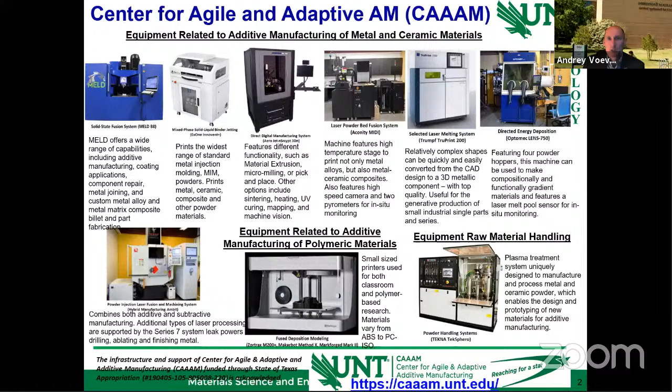This is combined with facilities we also have in coating and thin film deposition, which is one of my areas of expertise, working with thin film for a number of years, with machines ranging from sputtering to beam evaporation, ALD (atomic layer deposition), and chemical vapor deposition. We're combining some of these together in additive manufacturing approaches, especially for functional material devices and sintering, which we'll build on.

I wanted to bring this facility to your attention, as a note, since we have worked for years now with a group at CIDESI, and we'll be glad to extend potential additional research projects and ideas. All right, so now coming back to my talk.

I will talk today about 2 areas. One area is related to additive manufacturing of functional material device fabrication with 2D materials, two-dimensional materials. This is a combination of sputtering, thin film growth, and laser annealing with direct writing, which has enabled direct fabrication of semiconductor devices using 2D materials approaches, avoiding any pick and transfer in place. So it's basically direct production. This may be a non-traditional area for additive manufacturing if you think about component building, but it is a rapidly expanding area in functional material devices, and we're looking very closely at it.

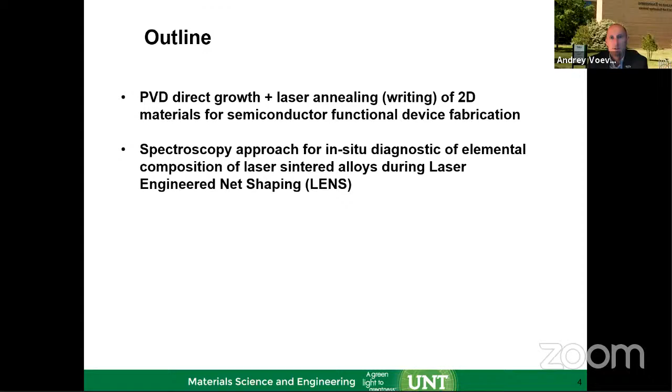The second topic is a little more traditional in terms of the platform used. We'll talk about laser sintering of alloys during Laser Engineered Net Shaping, or LENS. But the talk will not focus on how we do this; it will focus more on in situ diagnostics of the process, specifically chemical composition diagnostics, which enable gradient alloy fabrication. So there are 2 parts to the talk. I'll time myself so I can complete it within the seminar time and answer questions. All right, so let's start with the first one.

Just a brief reminder about 2D materials. These are materials which are monolayer in thickness, and therefore allow a host of very interesting physical as well as mechanical properties. In terms of physical properties, this is the confinement of charge carriers. If you take graphene, shown on the left chart, you can confine electrons.

Thus you have very interesting physical properties, leading to a host of applications ranging from computation, because of the very high speed. On the left chart here and below, you can see a comparison of mobility for charge transfer, compared to different types of materials used in electronics, like polycrystalline silicon, for example, or carbon nanotubes, etc.

You can see that graphene is the absolute winner in terms of how fast the charge carrier can be transferred. So there's a lot of interest in high-speed computing using that. There are also other interesting properties, like anisotropy of thermal property propagation, which is another very interesting feature of graphene and monolayers.

Since the Nobel Prize was awarded for the extraction of graphene and showing its physical properties, that gave impact to a host of 2D material development, where you can have a range from semiconducting to insulating. On the right side here, you have band gaps all the way to 6 electron volts. This is hexagonal boron nitride, an insulator material extracted in 2D form. In between, there's a group of semiconducting materials where the band gap can be engineered anywhere from 0 to a few electron volts.

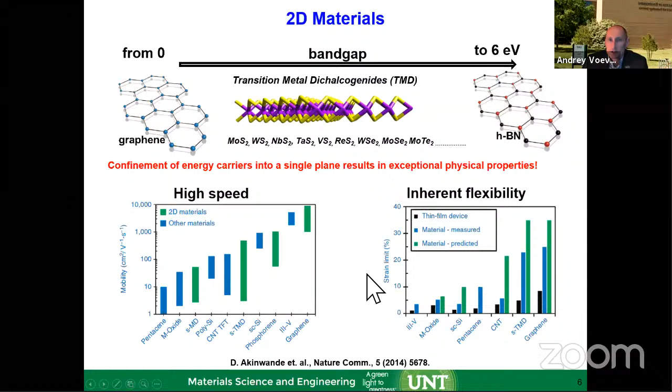So the question really becomes: there's a lot of interest in how we can make them, and how we can make them cost-effectively, not the way it was done before with scotch tape techniques or others. There are some challenges along that way. We're still in the 2D community focusing on that. There is a challenge here, and I'll show you some of the advanced ways. The challenge facing the 2D community in terms of fabrication and using them in devices is production at larger scale and at low temperatures.

The problem is that if you follow the literature on 2D materials fabrication, you'll find that most of the processes, like 90% of them, use high temperature growth. CVD, chemical vapor deposition, is one of the most popular techniques, where you take gases, which can be carbon-containing, feed them into tube furnaces with a catalyst, and at 800-900 C, the gases decompose and you start forming graphene if you're using a copper or nickel substrate. Or you can grow molybdenum disulfide or tungsten diselenide if you're using sulfur and selenium additions with the metals.

But high temperatures also lead to crystalline growth, and they grow in this layered formation as shown here, as a monolayer-thick molybdenum disulfide on a sapphire substrate. If you look from the top, a planar view, you'll notice they nucleate and grow as perfect crystals—in this case triangular-shaped crystals—and they pop up and start spreading until they cover the entire surface.

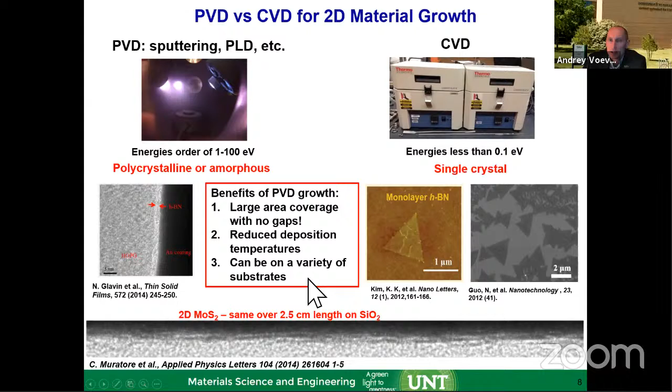And this decouples it from CVD. Fundamentally, PVD uses high density flux, so you have high deposition flux and high kinetic energy. In chemical vapor deposition, you're using low density flux and low incoming kinetic energy, achieved by high temperature. So in CVD, you're using the temperature for atoms to hop around, find a place, and form the crystal that grows.

On the PVD side, you don't allow for that time. You bombard them with a lot of atoms. Those atoms have very short time to move around, and they're locked in place. If the temperature is too low, they will produce amorphous material. If the temperature is a little bit higher, you have enough energy and they will form nanocrystals. They will rarely, or almost never, grow a single crystal unless the temperature is too high. So low temperature, that's what it is.

So this is kind of a contrast process of both here. One of the things you need to watch for in these processes with the kinetic energies is the formation of defects in the crystal lattice.

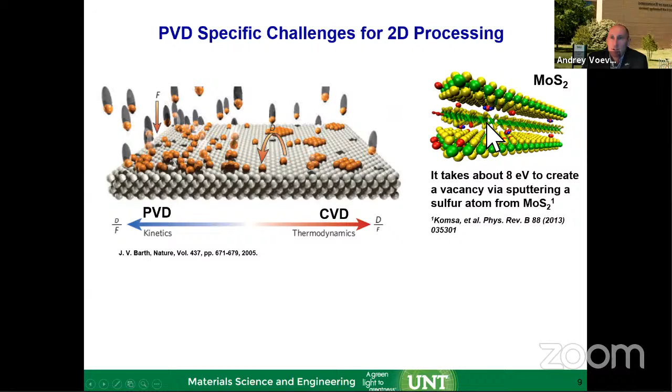If we work with 2D molybdenum disulfide and fabricate it this way, using high energy to bring the atoms and form them, the atoms can also have enough energy to knock out the sulfur, creating a sulfur vacancy. In the presence of oxygen, that vacancy can be filled with oxygen, so you can create defects through vacancy formation or oxygen incorporation. You need to watch out for this, since it takes about 8 eV of energy to create a vacancy, so you tweak the process accordingly.

Over time, you also learn how to control the growth in direct growth deposition, making the 002 plane and keeping the planar surface parallel, and how to reduce defect formation by controlling argon bombardment, while keeping the stoichiometry correct.

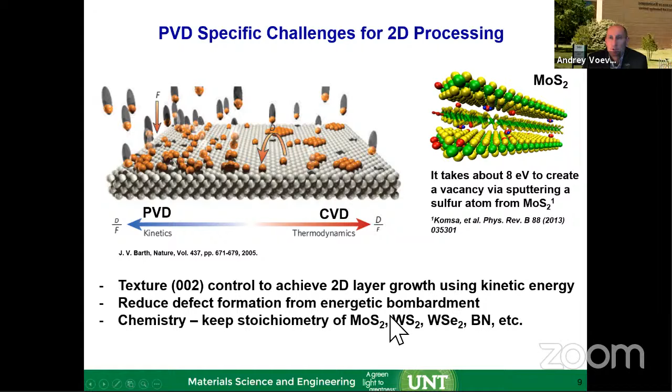Sulfur easily combines with oxygen and hydrogen and can be evacuated from the vacuum chamber. So keeping the molybdenum to sulfur ratio at 1:2 is important to achieve the right electronic properties. That was also something learned through this process.

For analysis, we use the Raman spectrometer, which is very sensitive to breathing modes or vibrations in molybdenum disulfide, both in the planar and perpendicular directions. Since there are two primary vibration modes, they appear in the Raman signal as two peaks.

So you can have in-plane and out-of-plane vibration peaks. Interestingly, the distance between that in-plane and out-of-plane vibration peak position depends on how many monolayers you have. Therefore, by measuring the distance from one peak to another, you can actually measure how many monolayers you produce. You don't have to do the TEM and wait for the destructive analysis, you can do in situ analysis of what you produced.

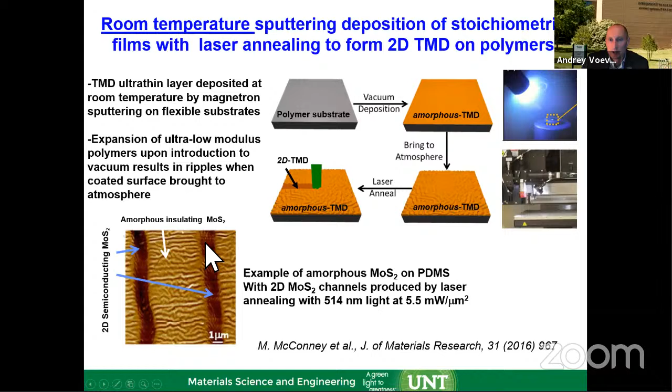From a physical properties perspective, the amorphous material is insulating, and crystalline is a semiconducting material. So essentially you can write semiconductor channels within the insulator. This leads to device fabrication in a direct way.

So then the process became a two-step process. Step one, you use a few seconds growth - we're talking about 60 to 120 seconds deposition time. We're using PVD sputtering of molybdenum disulfide, and you can cover as large an area as you wish. It's all amorphous. You can do it in-plane here.

You can move the targets. You can do the roll of the polymer film. It's because you're producing at room temperature, there's no requirement for heating the substrate. Everything becomes very simple, and it is very quick. Again, we talk about 60 to 120 second deposition time.

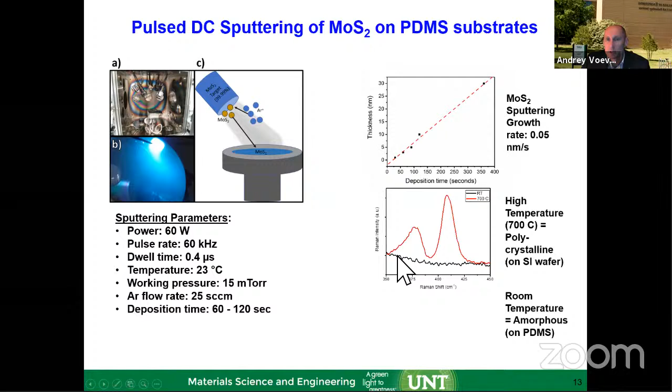Once you're producing it, it's amorphous. That means if you shine the Raman laser on it, you'll see the black curve, no peaks, no in-plane and out-of-plane vibrations, because there is no crystallinity. Only after laser annealing will you form the hexagonal materials, and you start seeing the peaks appearing here.

So in terms of growth, when you're growing on a flexible polymer PDMS structure, which is a stretchable polymer, after you grow that and take it out of the vacuum chamber, the polymer shrinks - because in vacuum it expands, and once you're out of the vacuum, it shrinks. So you're showing corrugating structures here, this is the surface of the film on a polymer that gets shrunk. At first we thought, okay, this could be a problem.

But then we found it's not a problem at all, because we're talking about just a few monolayer film production of the semiconducting material, and because it's conformal and flexible, it covers this perfectly. In fact, after being shrunk, you can also stretch it. So you can have a very high degree of stretching of that polymer and it still be operational.

All right, so in terms of annealing and power, of course there was a lot of experimentation on that. What's the optimal annealing power needed, how much energy to deposit, is there a wavelength dependence on that?

We found that there's actually very little wavelength dependence, but quite a bit of dependence on the density of the power you need to put per unit of area to anneal, because you want to find that balance of converting it to crystalline material, but not destroying it by ablation or other heating.

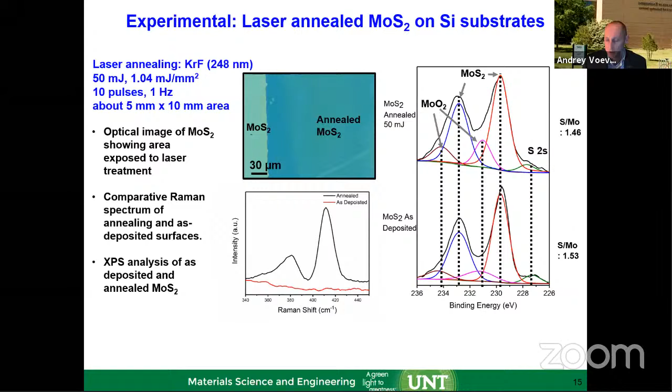There is a way around that, of course. You can think about annealing in an inert environment, but that adds to the cost of the production process, so we try to avoid that. Or you can start thinking about annealing under wide band gap materials, which I'll talk about in a moment.

Of course, annealing only occurs where you deposit the light. So as you draw lines, it is only within those lines that you get the crystalline material, and between is amorphous, which is insulating. So essentially, you can grow the semiconducting channels surrounded by insulator.

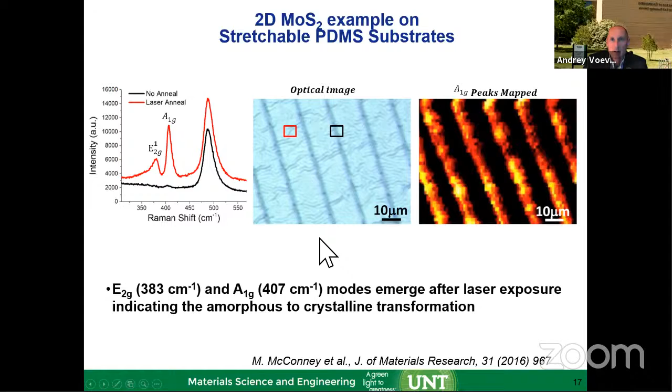This Raman mapping technique shows these channel productions here on molybdenum disulfide. And if we do the TEM analysis...

As deposited it is amorphous, but if you focus on that one channel and anneal it, you see a well-developed hexagonal structure of the material formed there. So you can convince yourself that during this annealing, right over here, I made that hexagonal material semiconducting.

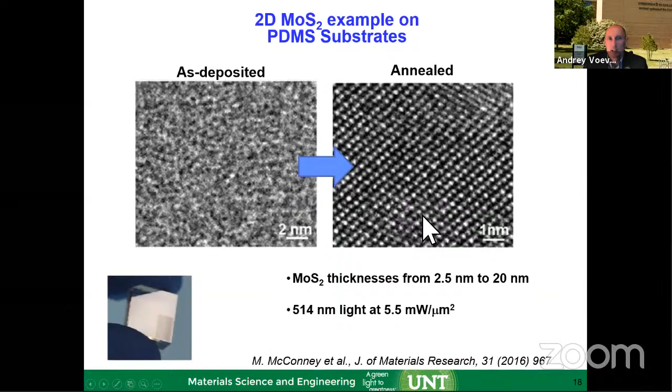That group working at the Air Force Research Laboratory continues to optimize the process. This is work by Dr. Nick Glavin and his team, who are advancing this process to the next level using a highly sophisticated combinatorial analysis method paired with autonomous experimental planning.

Essentially, they're using silicon pillar wafers, and each of the surfaces of the pillars—there are hundreds of thousands of them manufactured by lithography techniques on silicon—each surface is one experiment.

The way the autonomous experiments work is that the machine is programmed to deposit the heat of the laser on the surface to bring the temperature up by annealing, and monitor the temperature by Raman shift, then check the in-plane and out-of-plane vibration for the crystallinity.

Then the machine is set to find the optimum parameter by varying the gas composition or the power of the laser, in an autonomous way, running hundreds and thousands of experiments, self-guiding itself to achieve the highest sharpness of this in-plane, out-of-plane vibration, which gives you the highest crystallinity.

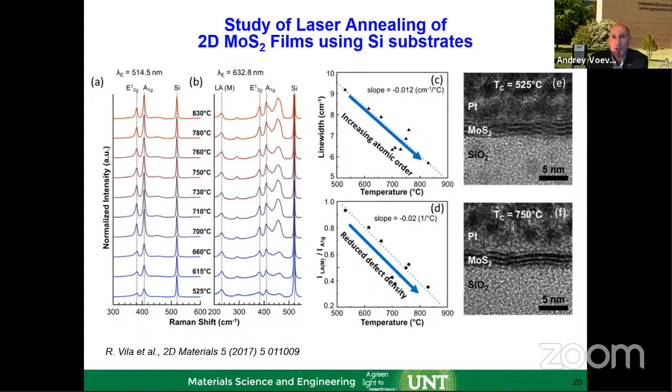Moving on, if you're not doing a flexible substrate here, it was demonstrated that we can do molybdenum disulfide and also heterostructures. You can grow molybdenum disulfide and tungsten disulfide as a bilayer structure and anneal it.

You can also anneal it under boron nitride, which is wide bandgap material, and this is leading now to the engineering of the entire device, where you can have a semiconducting layer.

You can also have boron nitride, which is a very good insulator dielectric material, and that leads to direct device fabrication. Because now you're not bounded by the temperature of the substrate, you can use polymer substrates for the growth of these amorphous materials by sputtering and using laser annealing for a very short time, not damaging the polymer, optimized just to anneal the semiconducting channel. I'll show some of those results along this way.

This one is actually coming from my group, done by my former student, Ben Sirota, working with me. As deposited, it is basically an insulator; once annealed, it shows current flow because it became semiconducting. It maintains flexibility, and we're using the separation between these two gold electrodes to measure all its electrical properties.

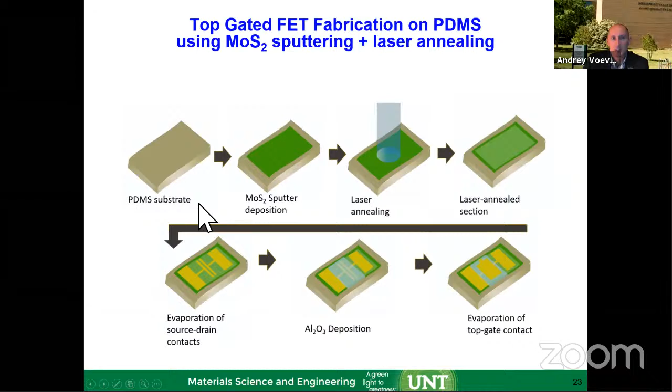The process became like this: we take the PDMS substrate, sputter molybdenum disulfide, and laser anneal it so we can have a semiconducting channel, which we now have right here. The next step is to deposit, using E-beam lithography, evaporation of source and drain contacts. Then we put a gate, which can be boron nitride, or in this case aluminum oxide made by ALD. Now we can have a top gate, and here we have a device directly fabricated on the PDMS structure without using any lift-off techniques.

We demonstrated that we can have a top-gated molybdenum disulfide field effect transistor on the PDMS made this way. This is our molybdenum disulfide, which is laser annealed, and this is our gate, in this case aluminum oxide, and there's switching behavior relative to the transistor operation.

Now the transistor is one application, but another is a sensor application, and with the pandemic, there's a lot of interest in sensors for COVID-19.

I would like to present the work of my longtime collaborator Christian Muratore and his wife, Melanie Muratore, who is in biology by expertise, while Chris Muratore is in thin film and growth technologies. Over the spring lockdown, when we were all forced to stay out of the labs, the two of them got together and thought about how we could use 2D materials, molybdenum disulfide, for COVID-19 sensing. They came out with this, and that paper was just published in the Journal of Vacuum Science and Technology. Chris is also a long-time AVS member, as am I.

I advise you to take a look at it. It is a great review of COVID-19 sensors based on 2D materials, and they also bring an idea which they realized.

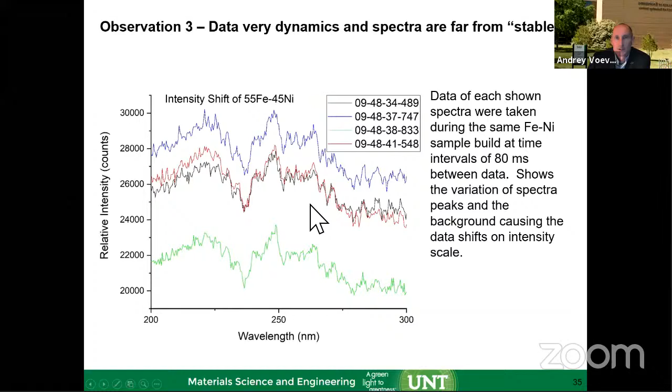First we have iron rich with less nickel, then we add more nickel and less iron, and then we finish with even more nickel, 45% nickel and 55% iron. So it's kind of a model system in the iron-nickel system where we know what powder we're feeding in the nozzles, and therefore we can correlate to the spectral signal from iron and nickel characteristic peaks.

We also did post-build EDX analysis to actually correlate that we're feeding the powders with this composition. We see that in iron, and we see that in the nickel, in terms of the production after it's done. So that's looking at the element distribution.

After we took the sample and cross-sectioned it, that was the bottom, that was the top. As we go from the bottom to the top, we're increasing the iron and dropping down the nickel because we're changing the powder feeding. We're also seeing changes in the morphology and more porosity development as we increase the iron towards the top of the build.

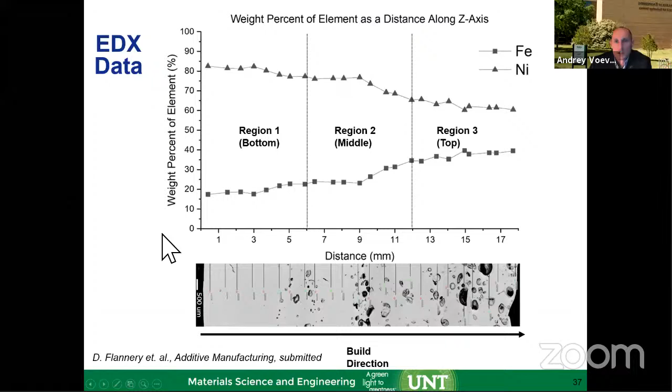But in this experiment, we were focusing most on the composition, because the objective was to correlate to the spectroscopy signal. All right, so what we see in terms of spectroscopy.

So when we take in the light during three regions, near the bottom, midway, and finishing up the sample, we have multiple spectra taken, averaging them out. We see, for example, for iron, this characteristic peak, and this is all in the UV region here, at 221 nanometers.

Now the numerals here, 2 and 1, are in spectroscopic nomenclature. The 2 means singly ionized, the 1 means excited atom. After excitation, it goes to ground state and emits that light, for example.

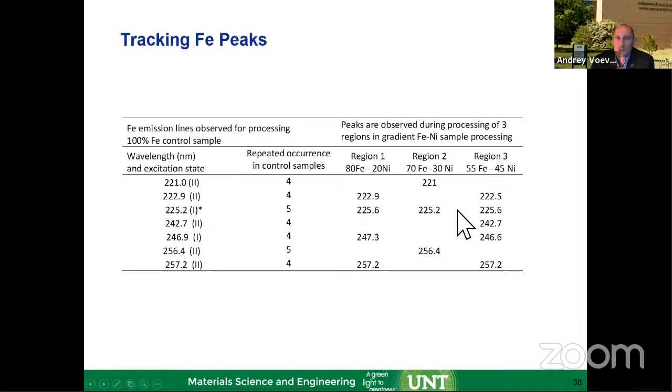What we see here on the right is whether we see that characteristic peak during all the builds. Sometimes we see it only in one region, but for some, like 225.2 for example, we see it consistently during the entire process. So we picked up those lines which we see consistently for correlation to the chemical composition.

The trend is there, but it's not yet very usable, I'll say, at this point, for any process control or looping until we reduce the scatter of the data in spectroscopy.

All right, so looking at the nickel peak, we also find those characteristic nickel peaks that compare well to the NIST databases for nickel excitation. Again, that excited peak seems to be appearing, and there are a few others appearing through all the regions.

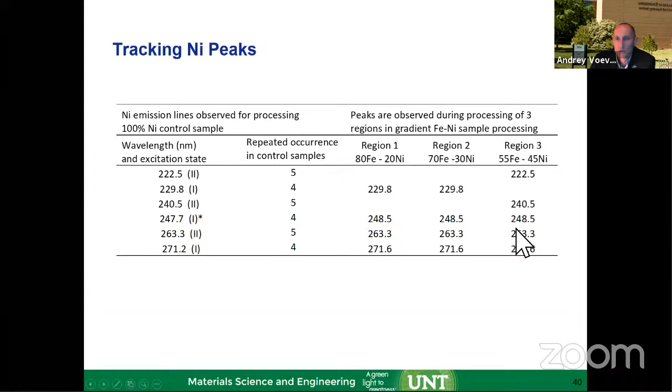When we plotted the nickel peak, our error bars got even larger. So from that perspective, we are changing the nickel composition here, but we don't see much of a spectroscopic signal within the error bars, and it stays flat. So we cannot conclude anything, either increasing or decreasing, on the nickel peak, even though we know that during the build we were changing the nickel composition as we go.

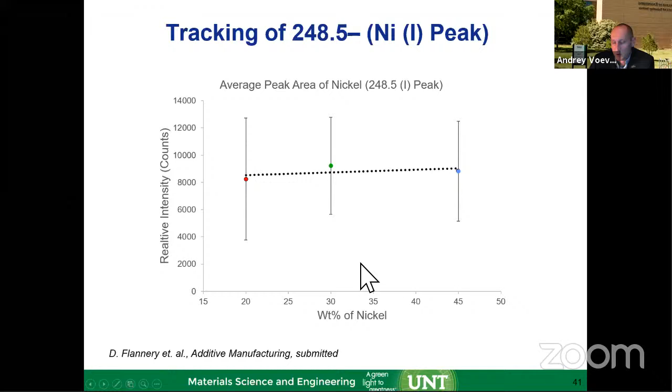So from that, coming to my concluding notes: on the first part, in the semiconductor metal additive manufacturing processing with lasers, I think we have great progress. We're at a point where we demonstrated that using this room temperature physical vapor deposition with amorphous material growth, then laser annealing, is a very good way to directly fabricate semiconducting materials on polymers.

Therefore, we're advancing with that to make first devices, showing transistors, and also showing you some sensors. We are very excited about one machine incoming now at UNT installation, called nScrypt, because it allows combining this method with pick and place of some elements, so we can build entire circuits and do this manufacturing in all steps.

Now, on the second part, in situ spectroscopy, I showed the way we are advancing, but also showed there are quite a few challenges we need to overcome for in situ spectroscopy for elemental composition. This is due to the dynamic nature of the additive manufacturing process itself: signal variance, uncertainty in the background, and peaks overlapping.

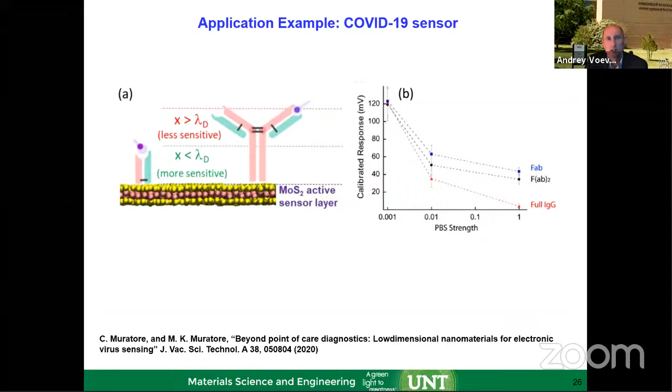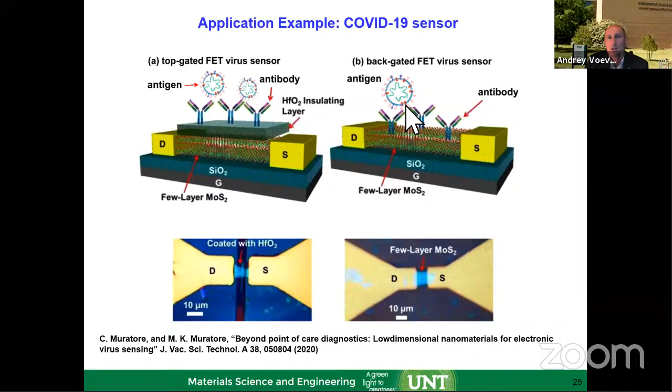Yes, it's all about the sensor only working if it can attach to a certain virus, and this is where the idea comes from: using synthetic antigens, which mimic antibodies, that only attach COVID-19 to that particular location, penetrating through the membrane. This is where the biology scientists are working.

What type of synthetic proteins are used? In this case, they find an enzyme that can be functionalized at that location specifically to react only with COVID-19. The other group is the sulfur linking that connects to the molybdenum sulfide. This needs to be very specific, very short, and well attached. So it's quite a bit of biology science research in identifying the right sequence.

A lot of work was done in this area. I'm not an expert there, but talking to colleagues who work on it, you can tune the sensitivity to different molecular groups—COVID-19 is only one of them. You can detect, for example, molecular groups relevant to your level of tiredness. When people are tired, they have certain molecular groups that can be detected. That's work going on at the Air Force Research Lab, looking at the ability to detect how tired personnel are.

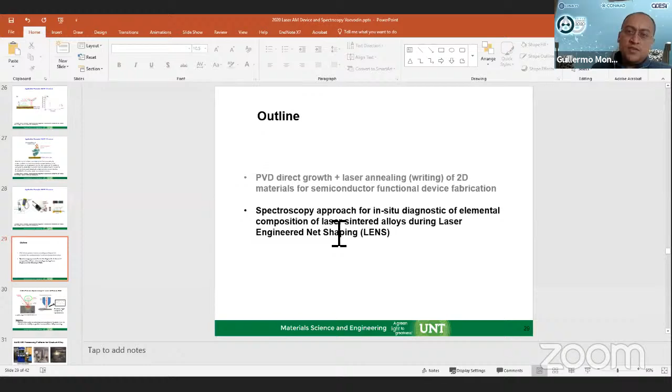Okay excellent, let's keep on this topic. I have a question related to the in situ Raman spectroscopy you use for MoS2 monitoring of the growth of the layers. Do you have any special requirements for this kind of Raman beams? Are they common Raman beams, or how do you install this into the PVD chambers and so on?

You're right. Yes, let me see if I can - I promise you, if I can get a movie out, just give me 30 seconds if I can allocate that movie and maybe help to answer some of the questions. My apology, somehow I didn't want to run it right away. I'm going to see if I can be able to have it.

No, I tried and I couldn't make it work. So I'm coming back, I apologize for that. Somehow on Zoom it doesn't want to go through that.

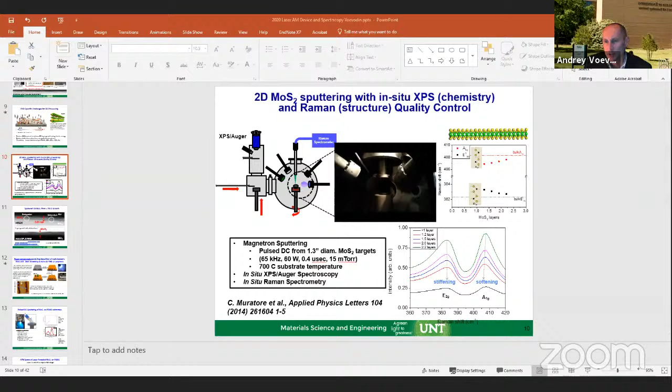So we actually use a regular objective, but we put it on a retractable shaft. In the vacuum chamber, the fiber optic comes in at the top, and that lens assembly was moving in and out. After sputtering for a few seconds, we bring the lens close, analyze it, then retract it out - it's a mechanical way of bringing a lens close and retracting. Maybe there are other ways of doing it, like moving the substrate under the laser, taking the signal, and moving it out. So this is the only requirement, because you have to focus with the Raman and you need to be close to 1 millimeter to the surface to be able to focus and return the signal.

So that's what's working fairly nicely in that case. No, again, apology for the movies - it doesn't seem to be working with it. Okay, thank you, you can get an idea.

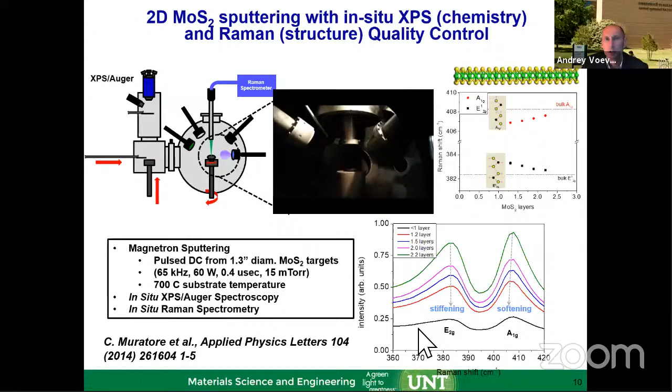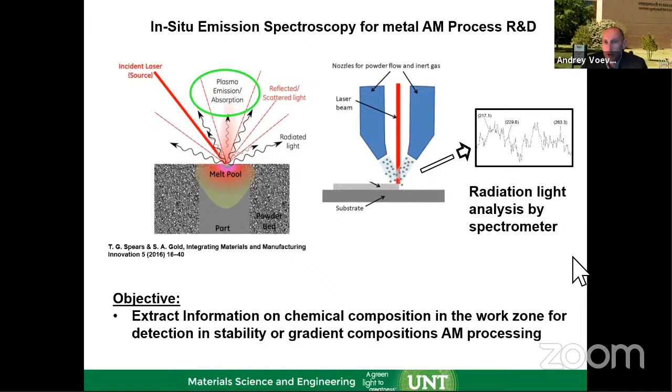So having a high speed and high sensitivity camera, much better than the ones we're using with Ocean Optics, will maybe answer the question. Of course there's a price cost - the Ocean Optic Flame with low sensitivity, not high speed camera, is very reasonable price. As you go more with the high sensitivity cameras, the price also goes up. So then it becomes a question of at what point it's too costly for manufacturing control. But for scientific exploration, that's what we are working on right now - we are advancing into that direction, investing in this type of camera.

Yeah, I wish I could answer that more, my apology, but I will probably refer to the papers discussing the attachment - we are using the sulfur linkage. The sulfur reacts with these enzymes through sulfur bridging, and once established, that allows for charge transfer and injection into the molybdenum disulfide, which we're using essentially as a resistor. So once you have additional charges there, you can have detection. But in terms of the exact reaction of the end of that molecular enzyme group with the sulfur, I would probably refer to those papers, because again, I'm not an expert - I'm using my long-time collaborator Chris Muratore's work here to highlight the use of these 2D manufacturing materials.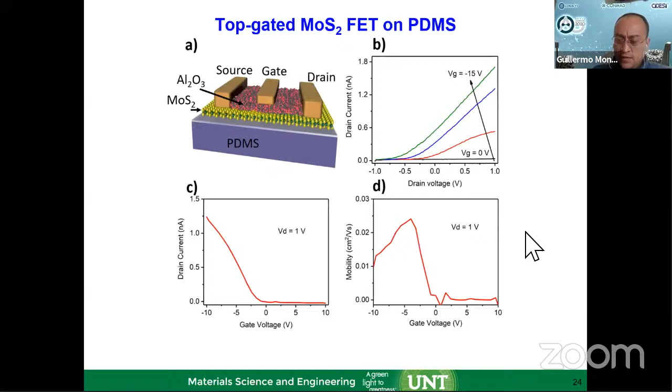Yes, thank you. Are there laser annealing conditions you use for your kind of writing? Are you doing this inside the PVD chamber? Ideally, if we can do it within the PVD chamber. At that moment, we don't have that.

So what we grow, molybdenum disulfide, tungsten disulfide, boron nitride, we all grow them in PVD chambers. The annealing is then outside.

But what we are actually doing right now, to protect molybdenum disulfide and tungsten disulfide from the surface, we're growing molybdenum disulfide structure, and then we grow boron nitride amorphous right on top of it, in PVD, just one step after another with two different targets. Then after extracting from the chamber, we anneal it through boron nitride.

An interesting part is that boron nitride is a wide band gap material, meaning it is very transparent to the laser beam coming in, which is absorbed by molybdenum disulfide and by the PDMS. So this allows us to protect the surface from oxidation.

So we're doing these experiments now. Hopefully we can share some results, but this is from the first results done years back, when you can anneal through the boron nitride on MoS2, and annealing it, that red curve, you can see the molybdenum disulfide peaks coming up, and the boron nitride. So that seems to be one of the ways of doing that.

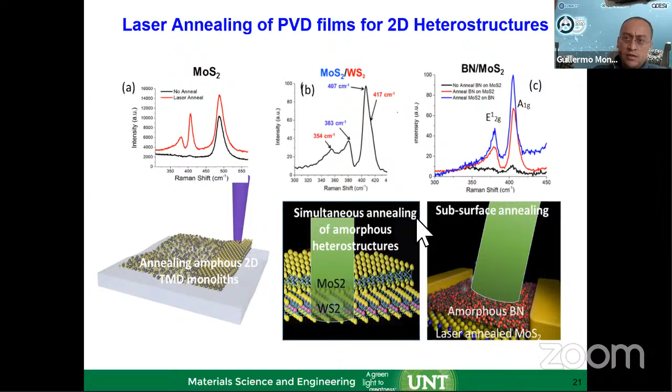Interesting. And in the second part of your talk, you showed iron nickel 3D printed structures. Are you foreseeing any applications for these alloy systems, or is it just exploratory? So the question is why we chose iron nickel.

Well, we were thinking about it, we wanted to have clear elemental composition, because we did try on titanium Ti6-4 alloys, and also on some TNZT alloys. But when you have multiple elements, it's very hard to differentiate. We wanted something more simple.

Iron nickel came to us because we thought it might be of interest to some, in terms of elements - nickel can be found in multiple parts, and iron as well. We're also able to work with these elemental powders. Iron is an elemental powder, more or less stable, nickel is also, so we can have elemental powders and mix them in different proportions.

So that was our line of thought. It's less driven by the intended application, and more about having a model system which we can work with fairly easily using elemental powders.

So that's the selection. When we're running, for example, Ti6-4, we see titanium, vanadium, aluminum - now we have three peaks to track. But we also wanted to change one powder composition to another, so we found iron and nickel was one of the suitable choices to do that.

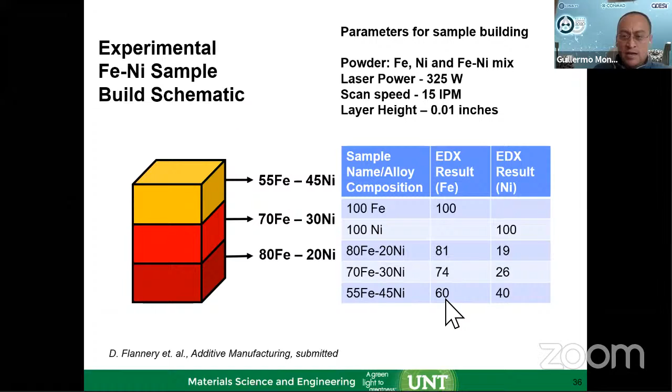So I want to say thank you for your very nice, interesting talk, your answers, and I think we should collaborate on these topics. We're also working hard on all these topics you mentioned, and I see a very bright future for these things. You have an invitation from me to visit us, and whenever this opportunity comes, we'll be glad to show our additive manufacturing center, which we built in situ, and what we're advancing. We're looking for collaborative opportunities.

Excellent work. Thank you, you get a virtual applause. Thank you again, thank you Guillermo. Keep safe. Thank you everyone who invited me, and I look forward to connecting in person. Look forward to the conference. Thank you. All right. Andre, thank you so much for everything. All right, thank you, see you soon.

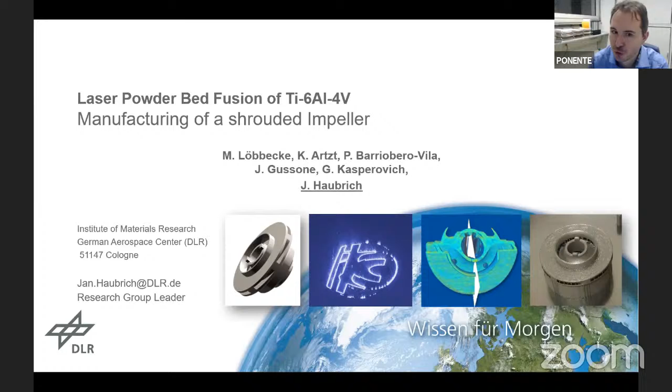So here at the DLR, we have been doing additive manufacturing for almost 10 years now, since roughly 2011-2012 when we started the activity. We're working on two main topics. First is material development and process development for existing materials. There we have conventional alloys like titanium 6-4 or the titanium aluminides, TNM-B1. We're recently working a lot with copper alloys for rocket engine applications. We also have projects with nickel-based materials for high temperature, high strength applications like turbine engines, and we're working on structural parts for satellites using aluminum alloys.

Besides those standard alloys, which we usually call conventional alloys because they are readily available and generally have not been developed specifically for additive manufacturing, we also work on tailoring existing alloys and developing new alloys specifically for additive manufacturing. For instance, we're working on titanium alloys. I don't know whether you can see my cursor, perhaps. Can you see my cursor?

Yes, doctor, we can see it.

So we're working, for instance, on the titanium alloy side on new alloys that do not suffer from this anisotropy and texture formation that you have in a process with directional cooling. Or we're working on materials that benefit strongly from the very high cooling rates laser additive manufacturing provides.

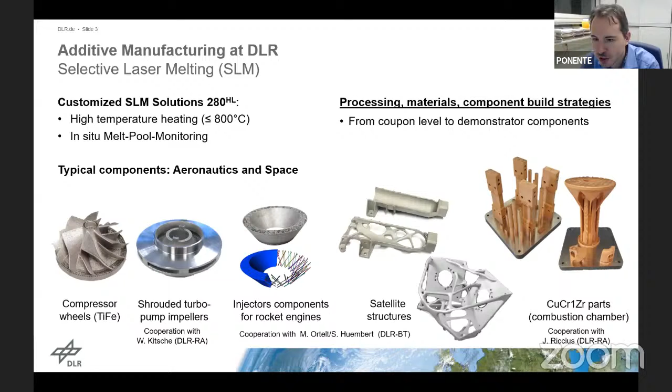On the right-hand side is a first demonstrator of a new combustion chamber we were just working on in a new project, and that's quite challenging.

So the technique we are using at the DLR is laser powder bed fusion, often also called selective laser melting, SLM, or LPBF, in which we have basically a fixed base plate that is going to be filled with CAD models to be printed.

Here at the DLR, we're using a customized SLM Solutions 280 machine, roughly 8 years old now. It has two specialities: one, a high temperature build plate platform that we can use for a very small amount of powder and for very high build temperatures.

What I'm going to show today, however, is built with the standard build plate, the large one shown here on top. The big build plate only reaches 200 degrees Celsius, and that's enough for titanium generally. Another speciality in our machine is an in-situ melt pool monitoring device that allows monitoring in situ the thermal emissions from the laser process. I'm going to show you what that's useful for at the end of this talk.

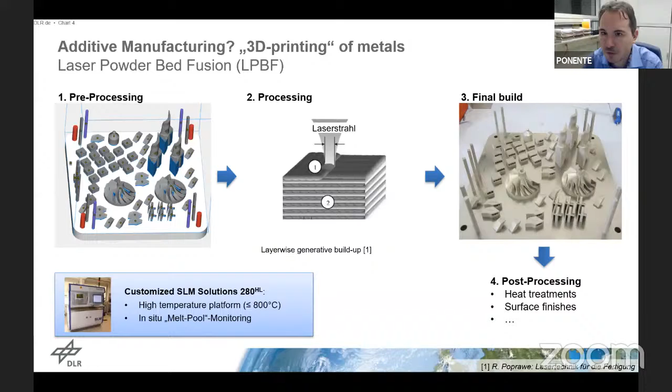Today I've chosen the example of a shrouded impeller that we've done in this project called Selective Laser Melting of Rocket Engine Components. That consisted of three aspects: the design of a rocket turbopump impeller, the development of the manufacturing chain or AM process chain, which in the end resulted in a successful spin test.

The rocket turbopump impeller itself is not an SLM design, as most of you will probably readily recognize—there are lots of flat internal surfaces that make manufacturing quite difficult. It's a conventional design developed for a two-part manufacturing route with a base part and a top plate that have in the past been brazed together.

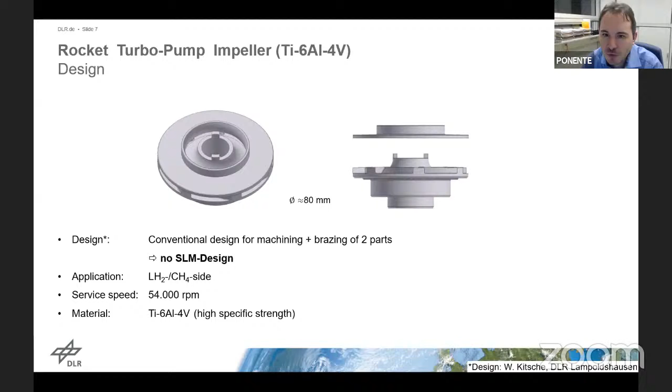Our goal in the project was to see whether we can modify that slightly, but only slightly, in order not to sacrifice performance, and manufacture this component in one part. It's a highly loaded part in terms of rotations—54,000 rotations per minute—so we went for the high strength titanium 6-4 for the material side.

The first thing we at the Institute of Materials Research had to do for this component was develop the AM manufacturing route. That started with process parameters, essentially laser parameters for the SLM machine. Other aspects included residual stresses and characterization of the mechanical properties of the materials we generated.

For the turbopump impeller, the surface quality is an issue because of the aerodynamic properties, and for the fuel transport—liquid hydrogen or liquid methane—that's transported by the impeller.

Other aspects are process stability, reproducibility, and quality that we had to work on in order to ensure the components would satisfy quality needs. One big part of the work was developing a build strategy, including supports and part orientation for this component, and the post-processing steps that affect all the other steps.

At the very end of this talk, I'd like to show how the things we developed early in our project on coupons, small cubes, in terms of process parameters or mechanical properties, actually relate to the mechanical properties of the material in the manufactured component in the end, because there's going to be a slight surprise there.

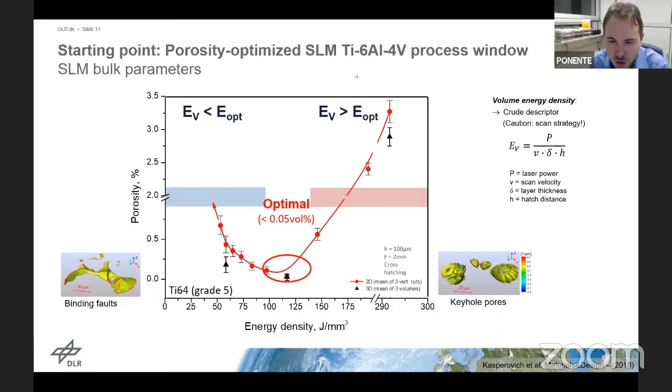So we asked what the microstructure looks like and how we have to adapt it in order to get proper mechanical properties.

In fact, XRD shows that there is already 2% of beta phase formed in this material. It's a BCC phase, whereas the martensite, the alpha prime or alpha phase in the titanium system, is an HCP phase. So increasing the volume energy density increases the amount of beta phase. It starts to decompose the martensite and stabilize the microstructure, which I'll come back to with the heat treatments in a moment.

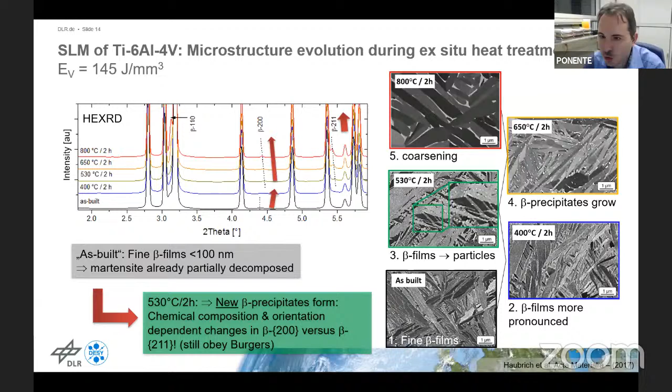At 400 and in the as-built state, we had these fine, thin white films between the martensite lath. And here we have this coarsening particle-type microstructure, which kind of resembles itself in the lattice parameter.

That's already telling us something about the composition of the beta phase here. This lattice constant typically goes down if the amount of beta stabilizers, so vanadium and iron in this alloy, increase in the beta phase. This shrinks the lattice constant. So this is already a strong hint that there is a partitioning effect and diffusion going on in the material.

In order to further understand that, we had a cooperation with the colleagues of the Max Planck Institute in Düsseldorf nearby who did atom probe tomography. It's a tomography used chemically, using a mass spectrometer essentially for detection of single atoms, with very, very small samples, but very high sensitivity.

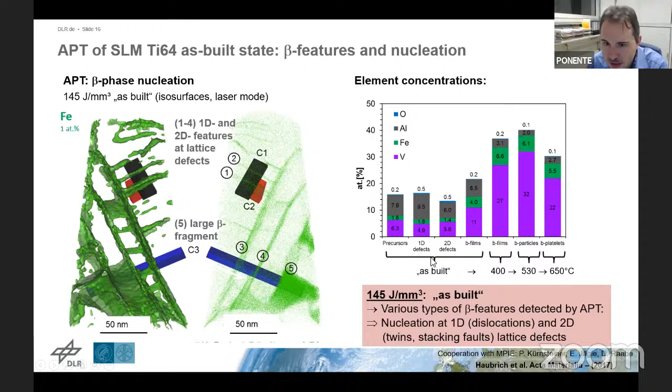APT further showed us information on the beta phase in the different conditions. Here you see on the right-hand side in the bottom axis, the different kind of beta phases in the as-built state and the 400 up to 650 degree heat-treated states. Without going into details, you readily see in pink, there's the amount of vanadium that changes dramatically. It goes to a maximum at roughly 530 degrees Celsius.

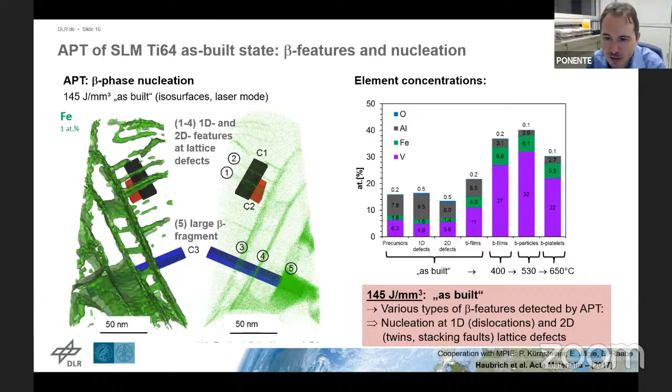Now this is atomic percent, I should note, whereas in the previous HEXRD, it's volume percent from the Rietveld analysis. But again, nonetheless, APT confirms the same trend. There's a maximum of diffusion of beta stabilizers into the beta phase at about 530 degrees, and at higher temperatures this trend changes again. This way, we were able to learn a bit about the beta phase formation using the combination of techniques.

And we were surprised to find that the partitioning is actually most pronounced not for the main beta stabilizer vanadium, but it's most pronounced for the iron in this case, much more sensitive than the vanadium, which also allows us to better track all these precursors in the material, for instance.

So in summary, we find that the heat treatments lead to a diffusion-driven martensite decomposition and the stabilization of the microstructure, so that at higher heat treatment temperatures, we end up with stabilized alpha-beta microstructures.

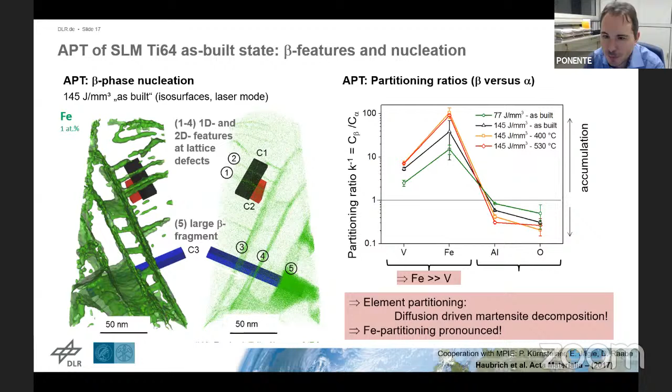One maybe rather interesting detail is the grading effect that you generally get in SLM or LPBF, which is due to the directional cooling, because you have a directional physical process. You put in the laser energy from the top, you lower the build plate down towards the bottom with each layer, and the material mass is also towards the bottom, so the heat flux goes downwards towards the base plate. It's directional cooling, and this kind of symmetry that you enforce on the physical process can lead, or should lead, to responses in the material.

And in fact, if you look at the microstructure along the height of a simple cubic specimen, you will find this kind of effect. Shown here is this very high energy parameter I showed in the beginning, where we have this very strongly stabilized alpha-beta microstructure in the as-built case. You see in the SEM images taken from the bottom and the center of the sample this kind of very nicely stabilized alpha-beta microstructure with a lot of beta phase.

Whereas if you take an SEM image from the top of the specimen, it's still this very martensitic microstructure. That's simply due to the fact that the bottom layers have seen more laser passes than the top layers that have been added to the specimen, whereas the top layers have only seen a few times of laser energy input into the material.

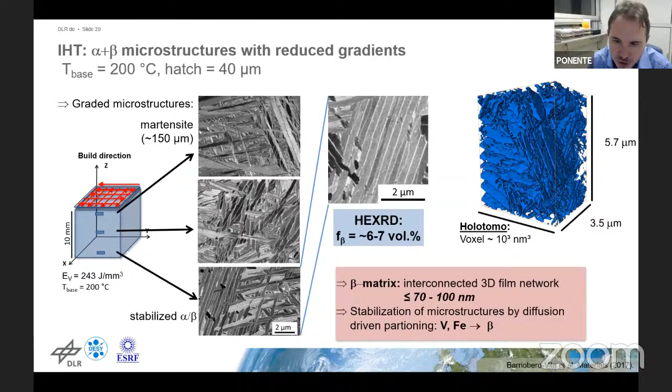Another issue I want to talk about today is the post-processing of SLM components or specimens, because in my opinion, or probably not only my opinion but the opinion of many industrial users at the moment, surface processing is one of the very key issues. Without resolving this issue, all the additional freedom that you have with 3D printing is not worth too much.

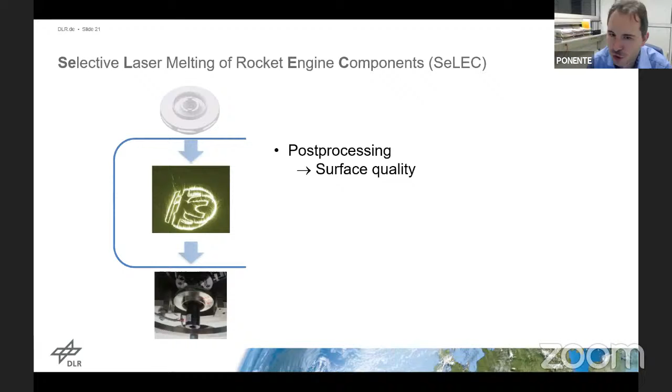Surface quality is very important in terms of the mechanical performance or aerodynamic performance of components, because if you have crack-like and poor, very rough surfaces with notch type defects due to the process, you have very poor fatigue performance. That's something you'd like to avoid.

And if you go to downskin surfaces, so surfaces that end up over the powder bed, this inward melting of the material at the edge is actually very pronounced with copper alloys, for instance.

This is very critical, something that is a limiting factor for 3D printing today. So we must find processing strategies as well as post-processing strategies to address these deficiencies.

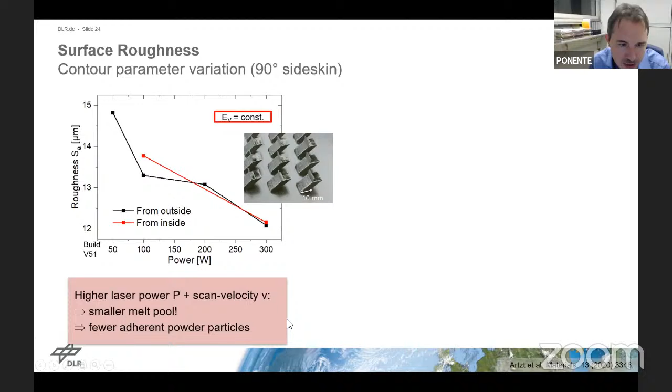Adjusting the laser parameters helps a bit, but what we found helps most is actually changing the scan strategy at the surfaces. So it's the question whether you only do bulk hatching, then it's only those green vectors, or you start putting contour lines and fill contour lines, different numbers of contour lines, 2 in this case, 5 in this case, with different distances and also with different scan order before or after the green bulk lines. That gives you a lot of space to optimize the surface quality.

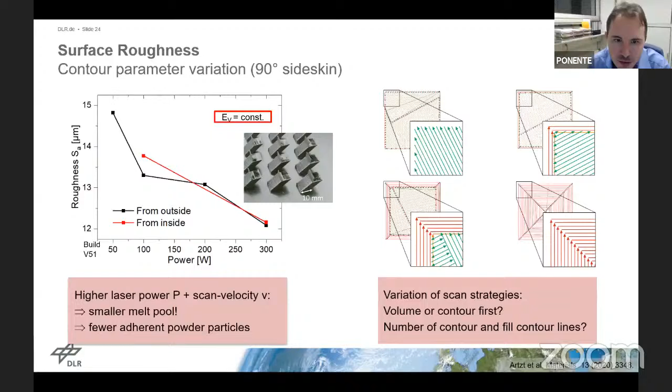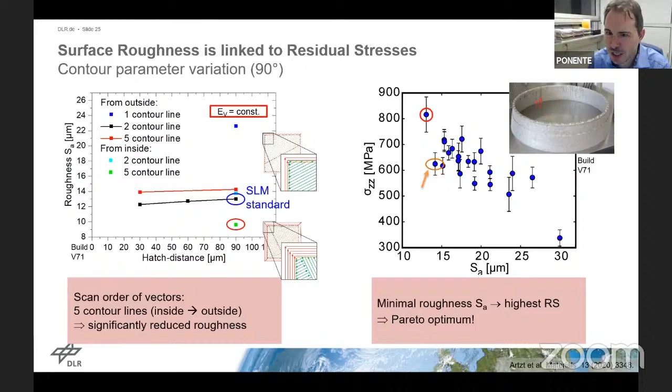So this is, let's say, the backside of the medal in this case. We couldn't optimize it as much as we'd like to have. So what we had to do in the project then for the impeller was develop or find post-processing strategies.

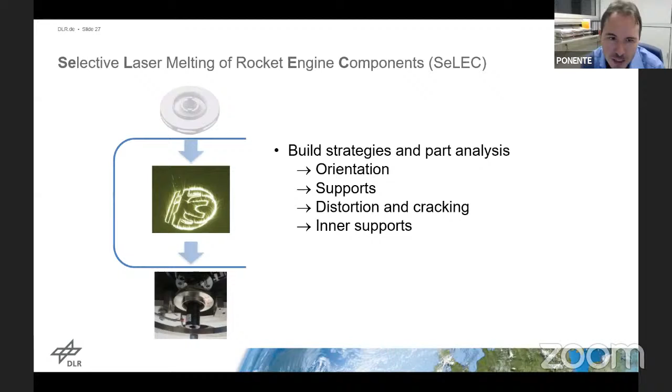We investigated a couple of processes and sent specimens to external companies to get them post-processed, and in this case we found a suitable processing strategy for our impeller. With that, I will now come to the build strategy for the impeller itself, which is based on these previous results.

The first aspect to take care of when manufacturing a component, as you probably know, is the orientation of the component and the question of supports. For this impeller, we had the option of two basic orientations: a diagonal one, at something like 45 to 50 degrees with respect to the surface normal. This orientation has the advantage that you need fewer internal supports to support the top surface, the downskin surfaces inside the part. But it has the disadvantage that any anisotropy the process gives you, due to directional vertical cooling, will not be oriented along the high symmetry axis of the impeller itself.

So you don't exploit the anisotropy here, since it's diagonal in that sense. That's better handled by the horizontal orientation, where you'd have two main axes in the texture or anisotropy of the part: one is the build direction, vertical, and the other is the in-plane direction, orthogonal to that, which would have different mechanical properties in the material. So this orientation would be more suitable in terms of engineering using the mechanical properties.

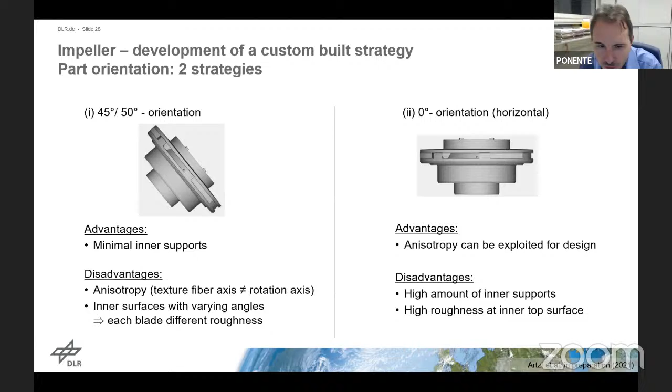But it is more complicated in terms of internal supports, because you will have all these flat downskin surfaces of the top plate that need to be supported. Otherwise, they will not be stable on top of the powder bed. So manufacturing-wise, this is the worst choice. So we started with the diagonal orientation, and we started developing support strategies.

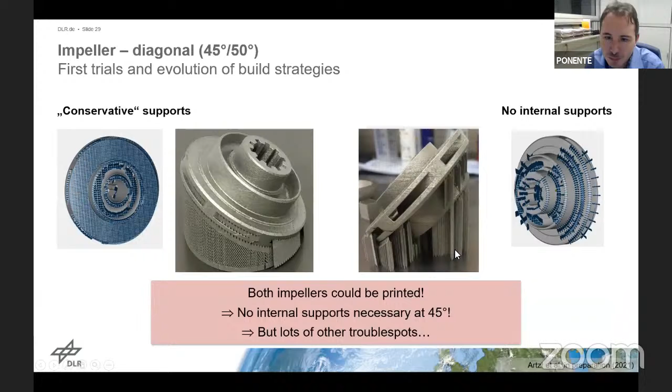If the supports detach from the base plate, that immediately means you will have distortion in the part due to thermal residual stresses. On the right-hand side, from this perspective it looks a little better, but in detailed images we also had serious troubles there. So in both cases, on the left-hand side it's detachment at the base plate with the supports, and on the right-hand side it's also detachment of the supports, but this time between the supports and the part itself.

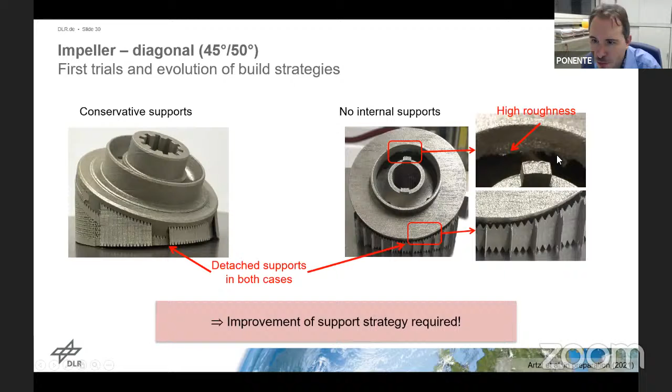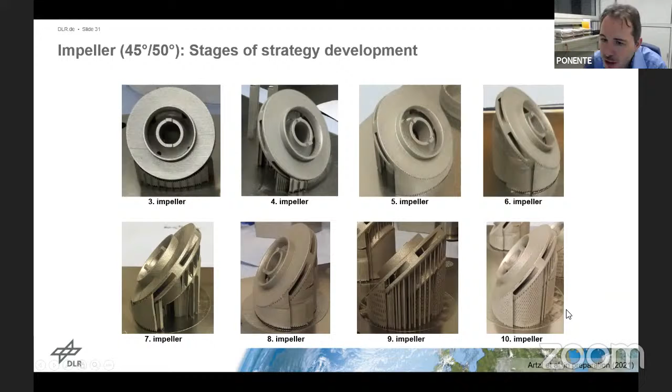On top of that, we found with this orientation for the right impeller that we have serious issues with surface quality and precision of the geometry in this top area, where we have downskin surfaces melting over the powder bed, with very strong inward melting. To address all these issues, we went through an empirical, iterative development of build strategies, with customization of supports and analysis of the part in between, which led to the build strategy shown on the right-hand side, the tenth impeller, which has a rather complicated support strategy. Some aspects we addressed here were the high surface roughness on this top surface.

We had different kinds of internal supports that we used here. In the end, we ended up with these 3 supports shown in the 3rd picture. These 3 supports are rather easily removed and they don't leave traces on the part itself, which is very nice.

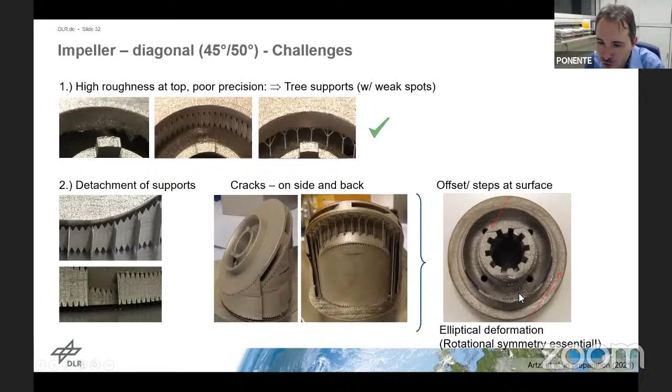You see some deformation here on the right-hand side. This part is all but round. So we had to work on the supports here. In the end, we were successful with a support strategy that contained 14 kinds of different customized supports, but it worked. So this is very empirical, I must say, at this point.

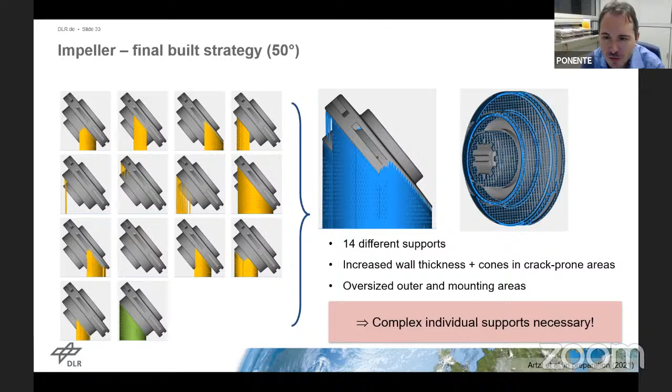This was like 3 years ago now. I would today wish for more support from process simulation here, because a lot of these empirical steps, probably using the right simulation, are simply avoidable today.

So now to conclude my talk, I want to give you a little bit of insight into how the process parameter developments that we did in the first part of our study on the coupon level, small cubes or so, actually relate to the mechanical part properties that we have in the manufactured demonstrator. And there we found actually a couple of surprises.

For this, we can use this tool in our machine called melt pool monitoring, which probably many of you already know, because today it's more or less standard in LPBF machines. We were one of the first customers to use it. It's basically a pyrometric tool with 2 photodiodes.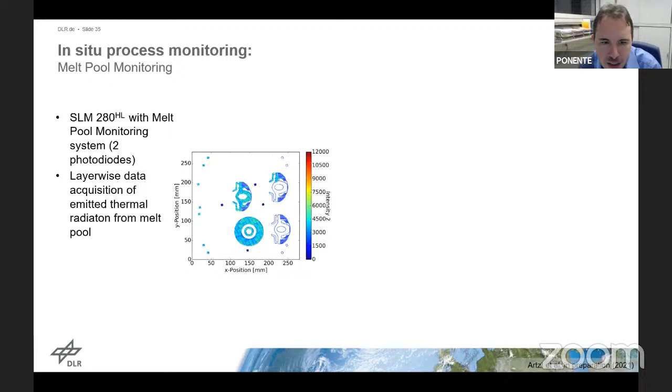And if you combine this kind of layer-wise data from subsequent layers into a 3D image and a 3D data set, which I hope you can see here.

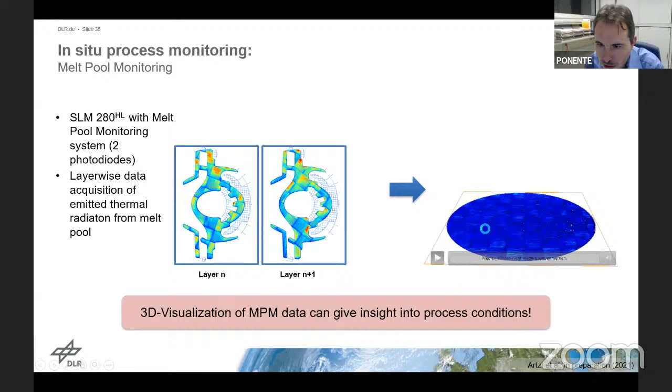I think this time we will have problems with the video. Sorry for that. Last time it worked, but apparently... I will restart the talk.

So the trick is, with this MPM data, you can combine this layer-wise information into a full 3D data set, which we are doing with our Institute for Software Technology here at the DLR. They developed a small software code for that, and I'll show you now how that is useful.

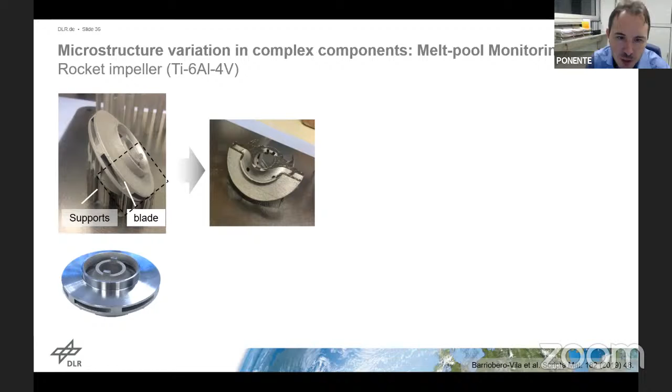We did that by producing one of those impellers with this very high energy SLM parameter set that gives these nice alpha-beta stabilized microstructures. We only manufactured part of that impeller, a cut from it to a certain height, and at the same time we recorded this melt pool monitoring data shown here.

On the right-hand side, you see a cross section through this 3-dimensional data. What you will readily and immediately recognize in this data is the increased heat in the downskin areas. These are known to overheat. You also recognize that there are other regions in the part that show a little bit of increased intensity, and regions that have a lot less thermal radiation in the MPM during the melting time.

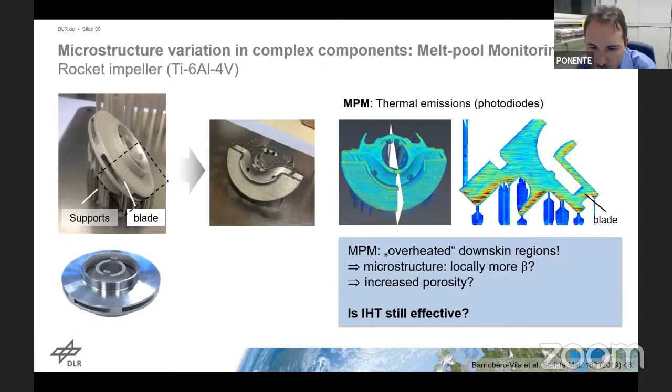So the question here is, what does the microstructure in this manufactured part finally look like? Is the same microstructure with the 6 to 7 volume percent of beta phase still achieved? Is the intrinsic heat treatment from the parameter that we got from the cube study still the same, leading to the same result here?

What we found is that, as expected, in the downskin regions, where the part gets particularly hot because it's over the powder bed and the heat cannot be conducted away from the part readily, there is an increased amount of beta phase, but it's only increased to like 6% or so, whereas the bulk of the part itself has only about 2% or 3% beta phase, which is a lot less than we found in the cube that we produced separately. This shows very readily that you have to be very careful with coupon studies and their transfer to components.

The component geometry, but the processing conditions—directly and indirectly influenceable—will affect the material properties in the resulting component, despite using the same parameters that were developed on small components or coupons in the beginning. And this is rather easy to explain.

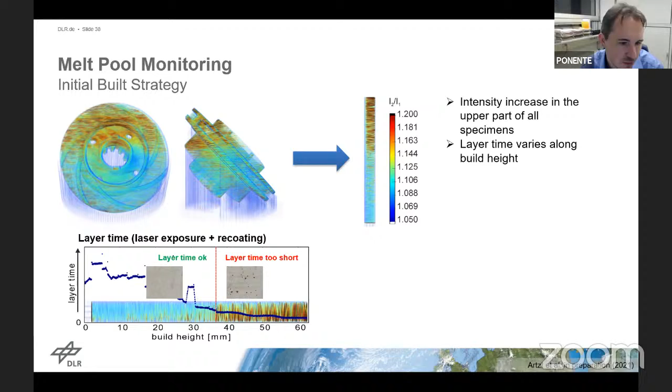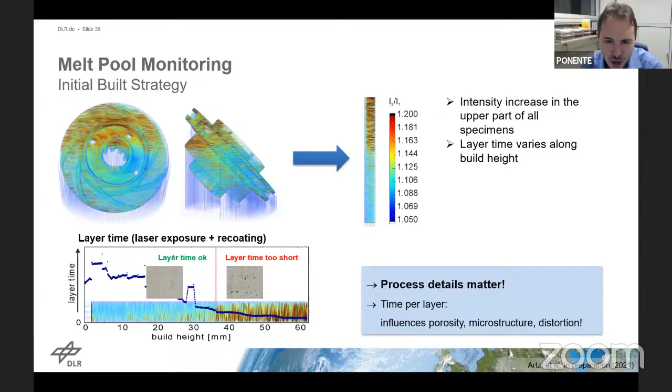So you have to really look for small effects, like the processing time per layer. If you change, for instance, the number of parts on a base plate during a build—making one build with a single impeller and one build with 6 impellers—the material properties will be different between those. This is simply a time effect in this case. It's kind of an indirect effect that's quite understandable and not very surprising when you think about it in the end, but we were surprised during our studies how much influence this actually has.

And with this, I want to finish my talk now. In our project, we were able in the end to produce this impeller, to process it with heat treatments. We used a heat treatment actually in combination with hot isostatic pressing, because this gave the best mechanical properties. It also ensured that we didn't have critical manufacturing defects in the parts that would in the end ruin the testing.

And in fact, the parts have been tested by spin testing at a company. Burst tests at 166,200 RPM were successful. By design, this part should have failed at this rotational speed, but it actually didn't. We even had only very minimal plastic deformation after the burst test. So we were kind of surprised that we actually did succeed in this project—none of us would have thought, given all the challenges in additive manufacturing, that we would actually succeed here.

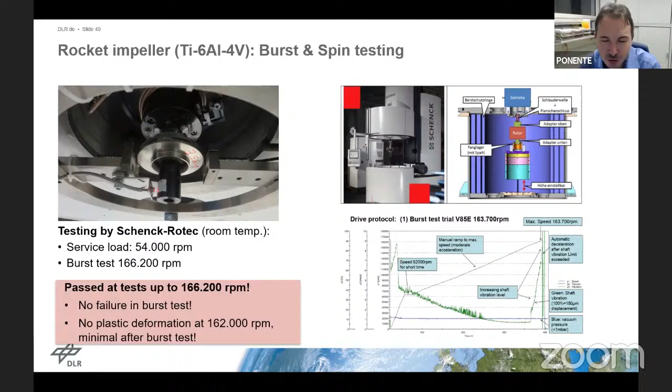And with this, I would like to wrap up my talk. There's a couple of topics that I could not touch upon—for instance, the heat treatments in combination with mechanical testing, so adjusting the properties for the components. I couldn't really talk about the residual stresses much, and I couldn't talk about a number of other topics, for instance improvements of the machine technology in terms of process gas atmosphere and so on.

But I hope I could convey that laser powder bed fusion and additive manufacturing is quite powerful—not only interesting for materials researchers and engineers, but quite powerful. The material in the coupons and the parts, and the properties of both, are linked intrinsically by the process, meaning we have very strong leverage to influence the material properties in parts and components through all these process parameters.

This is good, but on the downside, the bad side, it also means it's quite complex research that one has to do because of the many influence factors we'll have here. In the future, I hope the quality and reliability of simulations will improve rapidly, because only then I believe the full potential of additive manufacturing can be exploited at all.

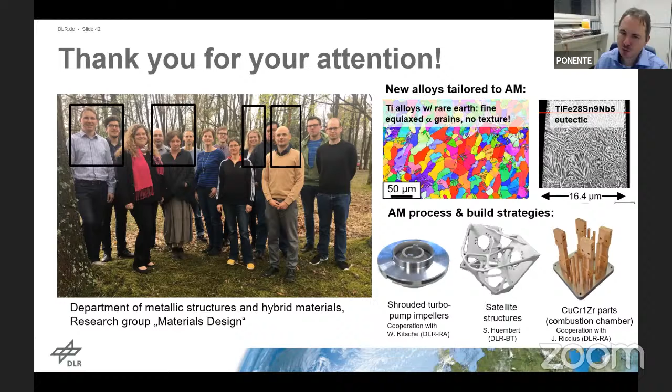Many mechanical mounting surfaces that have to be highly precise have to be machined anyway, because you won't get the precision you need. Here's an easy argument: beside the melt shapes, you see a lot of powder particles attached to the surface. Typical SLM powder has an average diameter of 40 microns, distributed between 10 and 60. Your part has two sides, and at each side you have particles attached to the surface, even if your melt tracks end perfectly on the geometry, which isn't even the case here. Two sides, two times 50 micrometers means your best accuracy is plus minus 0.1 millimeters. These phenomena, simply due to this generative process with the melt, tell me it's rather hopeless to expect you can entirely avoid surface processing.

All right, we have more questions here. Some in Spanish, but I think Jan cannot speak Spanish yet, or maybe you do? No, unfortunately not.

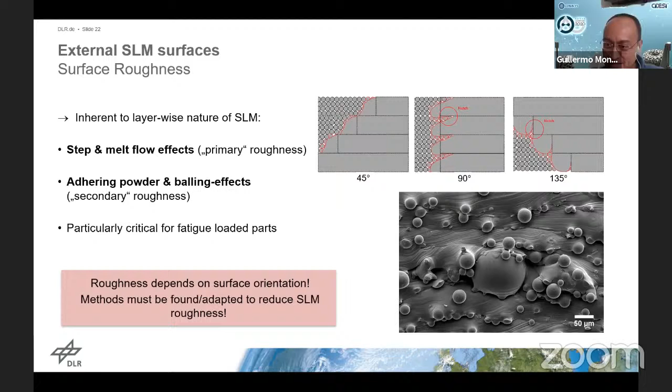Let's translate: what's the influence of the shape of the pores and their sizes on the mechanical properties of the product? The effect is mostly on the fatigue side of things - think in terms of stress concentrations. If you have very sharp edges at these pores, like balling pores with unmolten particles and poor fusing of different layers, you get very high stress concentrations at the edge, which can enable easy crack nucleation. So materials with this kind of pore are very big, corresponding to the size of powder particles, 50 microns or larger, and their shape is very critical - this kind of material you really want to avoid. Round pores are still rather big, but even cast materials possess a certain amount of pores, so that's not untypical for other materials either, and they're at least not as critical in terms of shape. I'd rather go for a process parameter set with a few of those round pores, rather than risking a parameter set that may have only a single or a few of the sharp, critical kind.

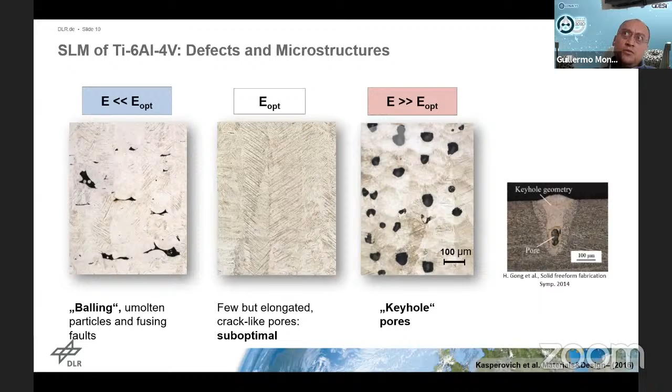All right, excellent. I have a general question: maybe these atom probe images you mentioned and showed, how do you produce them?

Is it FIB cuts and then slicing on the TEM? Yes, this is what you do. How much time do you invest in these things? That's something our cooperators at MPIE in Düsseldorf did, Philipp Kürnsteiner, Eric Jägle, and Dierk Raabe. As you described, first by FIB you machine a very small, very sharp tip with a base diameter of like 100 nanometers and a length of maybe 200 nanometers out of a specimen. That certainly takes a day, or half a day maybe, per tip. You transfer them into the APT, an ultra high vacuum machine with an energy source like a laser. In this case, the laser mode of the APT was used to evaporate the material of the tip starting from the top, and the material dissipates in the vacuum, and there's a mass spectrometer that tries to measure the atoms that are atomized there. So it's a very tricky technique, we don't have one here at the DLR. It's a rather expensive instrument, as I understand, but I think also a very powerful one.

Yes, it looks like very nice results you have. I think somebody else is trying to ask. Jennifer, please ask, just write your question here.